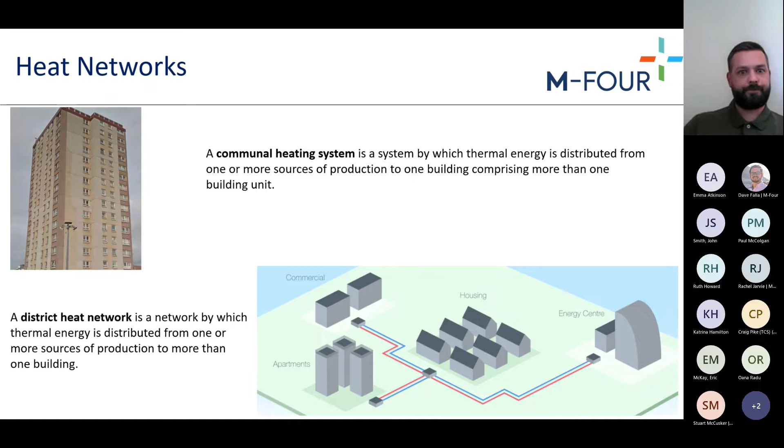So what are the benefits of heat networks? Both new and existing heat networks have significant potential to contribute to our climate and fuel poverty targets. A well-designed heat network has potential to deliver heat at scale far more efficiently than lots of individual heating systems generating heat within the home, often involving combustion.

There's even greater potential when we think about the heat network scope for incorporating low carbon heat sources and other types of renewable technologies. Heat networks are very much local infrastructure projects, and they are able to make use of existing local infrastructure and industry. It is possible to use what would essentially be waste heat from industrial processes or from waste and sewage.

Low carbon technologies such as heat pumps can be used - air source, ground source, water source. The great thing about using heat pumps is that one unit of electricity will result in multiple units of heat, so they're very efficient.

Where we are looking to move to the electrification of heat, and particularly within our heat networks, the option to include local electrical generation and storage, such as PV and battery, can make it even more efficient because it reduces the amount of electricity that has to be purchased from the grid at cost, and potentially, at the moment definitely, much more carbon intensive electricity.

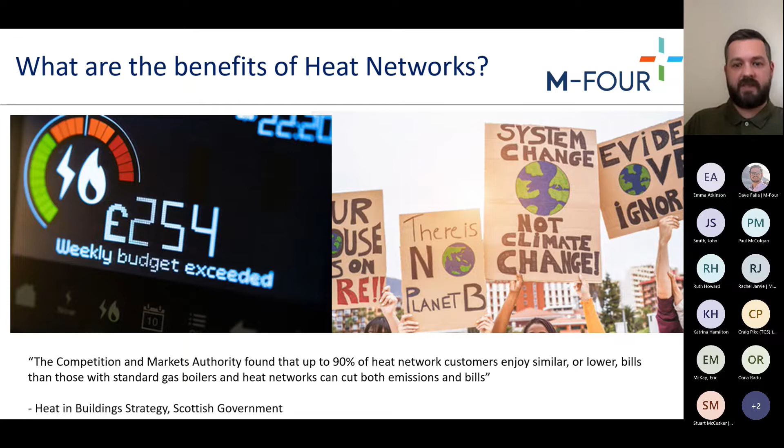Now that doesn't sound like a massively bold statement, it's a little bit vague, but as we get through this, we'll talk more about how completely unregulated heat network markets are at the moment, and actually how impressive that is, given that there are very little rules to follow or customer protection in place around these things. So again, it's another example of heat networks being effective and efficient.

So what do the Scottish Government think about heat networks? Well, unsurprisingly, they think they're great too. The Heat Network Scotland Act sets statutory targets for the deployment of heat networks by 2027 and 2030. The Act aims to accelerate the deployment of heat networks in Scotland through introducing a regulatory system which is aimed to boost confidence in the market, both from consumers and to give greater certainty to investors as well.

So the Scottish Government, within the Heat in Buildings Strategy, have identified a number of no and low regrets strategic technologies which they are confident can be deployed now. The technology there, it's proven, and it can make an immediate impact on our progress towards our net zero ambitions.

So these technologies are energy efficiency - so this is fabric first and demand reduction. We've been talking about this for a long time. The most important thing we can do, the biggest win we can have, is to actually reduce the amount of energy that we need to use to heat our homes in the first place.

The other strategic technology is heat pumps. Various priorities there, the biggest priority being heat pumps in off-gas areas. Still a challenge with heat pumps in on-gas areas due to the cost of electricity there, and there's also some considerations around which areas may or may not be moved on to hydrogen in the future.

And the other one, and the subject of today's session, is the low and zero emission heat networks.

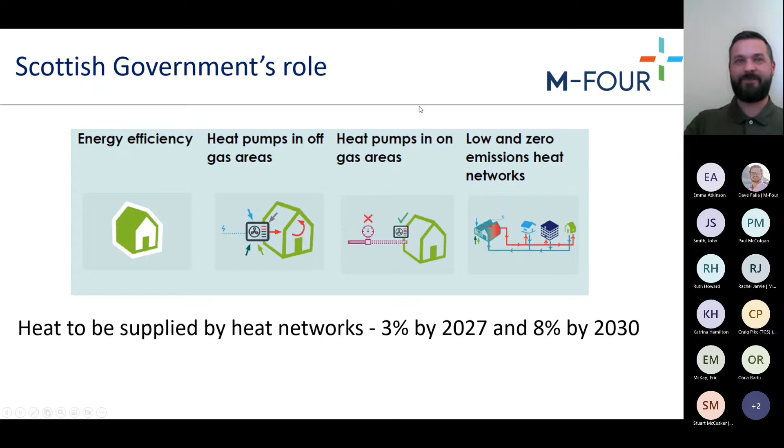So the Heat Networks Scotland Act 2021 is really looking to pave the way for a regulatory framework and help grow the heat network market. I'm not going to talk about this in a huge amount, but I will summarise some of these key requirements that are introduced.

So the first two there, the building assessment reports and the heat network zones. The assessments and zoning are putting greater consideration to thinking about heat networks in the planning stages of developments and providing additional support to do that. An example of that is that in April this year, the Scottish Government published the Potential Heat Network Zones First National Assessment. This report provides the methodology and potential for heat networks, as well as heat network potential maps for the whole of Scotland.

Licenses and consents. The idea of this is to provide greater scrutiny of planned developments and to ensure that the high standards expected are delivered by fit and proper operators. Permits will give longer term assurance on potential customer bases to investors, and power for license holders should reduce the time and cost of the construction and maintenance of these systems.

And the final one, the asset schedule and the transfer scheme, place a requirement on operators to have a scheme in place for the transfer to a third party if required, should, for whatever reason, they no longer be able to provide heat to their customers.

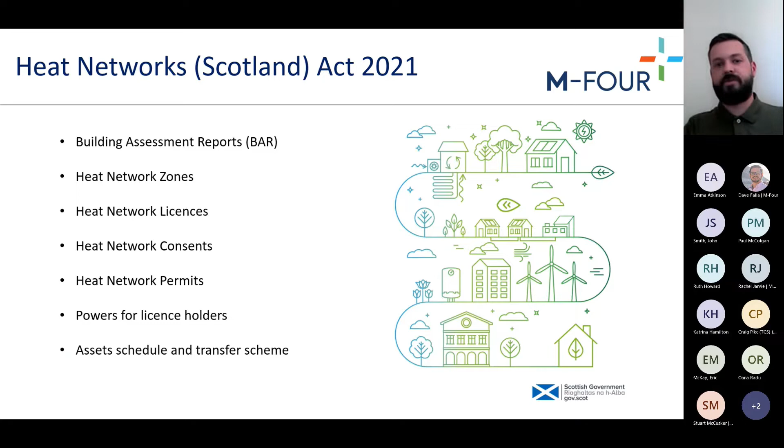So in terms of design and construction, not going to comment a lot on this today. It's a massive subject, as I said. It is one that M-Four do get involved with, but personally my role is in some of the other areas around heat networks. These are complex infrastructure projects. It could be said, or it is the case with any heating system, they need to be designed well and installed well, but that is particularly so with heat networks if we want to capitalise on the benefits that they can deliver. They require specific sets of skills and experience to design, install and operate them.

So at M-Four, we are involved in this. Whenever we provide support for clients, we ensure that the support we provide is in line with the Heat Networks Code of Practice for the UK. This has been developed by the Chartered Institute of Building Services Engineers, along with other bodies. There is an examination and certification there which can certify you as a heat network consultant as well. We always recommend this. We think it is a great tool. It helps to establish minimum standards and best practices to improve the quality and performance of district heating projects, from concept and design right through to the installation and operation of these systems.

It's a really useful tool for procurement for buyers. It places quite a bit of emphasis on the quality of the brief from the buyer to make sure you get what you want and what you need, and it gives advice on how to achieve that. You can specify within your tenders that you expect the requirements and process to be followed according to this code of practice. It also provides guidance on setting performance metrics, for example, the amount of heat loss you'd expect from the primary network. It gives performance metrics for those, allowing testing across various different areas of performance and at every stage to verify that.

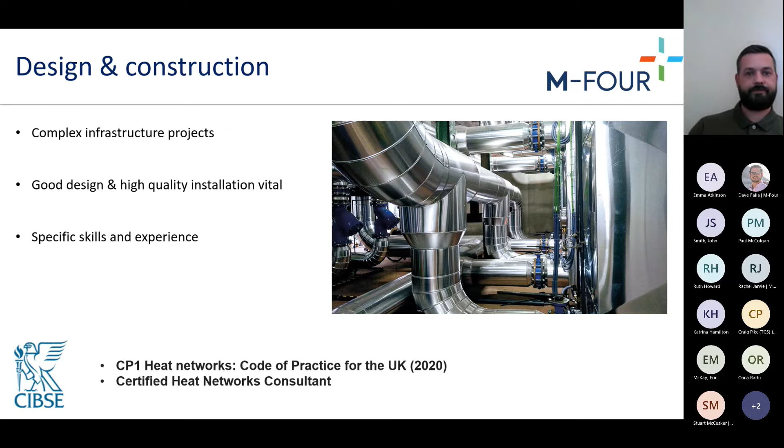One of the biggest differences with heat networks is that we're supplying heat. We're not supplying electricity or any other kind of fuel which can be used to generate electricity or generate heat within the home. Someone becomes a heat supplier. The heat networks metering and billing regulations define a heat supplier as any legal entity, person or organisation that supplies and charges for the supply of heating to a final customer through a communal single building or district multi-building heat network. So basically, if you're a heat supplier, these apply.

Now, what we're finding is that not everyone developing a heat network will want to become a heat supplier. Heat suppliers have a contractual relationship with their customers for the supply of heat, and there are various compliance requirements you have to adhere to. The organisations that fulfil this role can vary greatly from network to network. There's a lot of dedicated heat network companies out there, or energy supply companies. The property developer may decide to do it. Housing associations or local authorities, infrastructure projects and new developments might decide to do it. Community organisations, management companies. So it's a really big list, and it is very varied in terms of who can become the heat supplier.

So we'll talk about some of the challenges of compliance there. But there are advantages too. One is that as a company, you can set the charge for the kilowatt hours of heat that your customers buy from you.

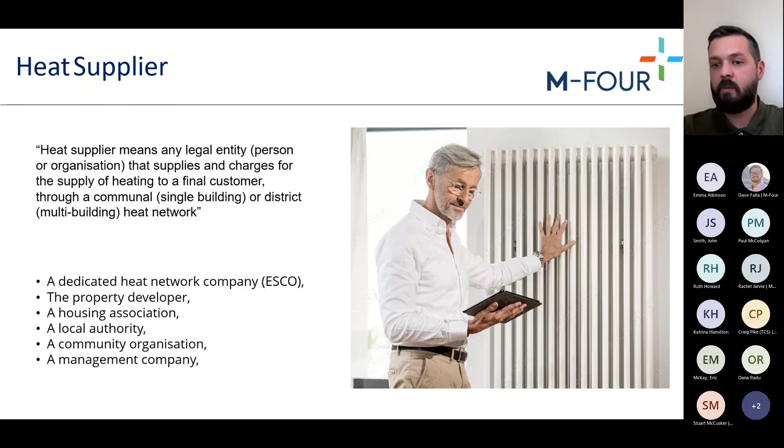If you're a community group, you may wish to create a fund allowing reinvestment in the community, additional energy efficiency measures, environmental and landscaping works, those kind of things. So it really is quite varied.

Metering and billing is similar but different on heat networks. Heat suppliers must comply with the heat networks metering and billing regulations, and we'll talk more about what's included. But one of the biggest differences is that with gas and electricity, we don't even think about it—our metering and billing is such a well-established process that it just happens.

There's probably a meter in the property already. If not, more than likely our energy supplier would deal with that, and with billing as well. But in the same way someone developing a heat network might not want to be the heat supplier, they might not have the skills, experience, or desire to be the metering and billing agent either.

So it's very common in the heat networks market to use a third party for this. That third party could do your metering and billing, and I believe it's also possible for these to be separated or incorporated into your existing finance systems. There are a couple of well-established companies out there, but it's a very new, emerging and competitive market—an exciting space with a lot going on just now.

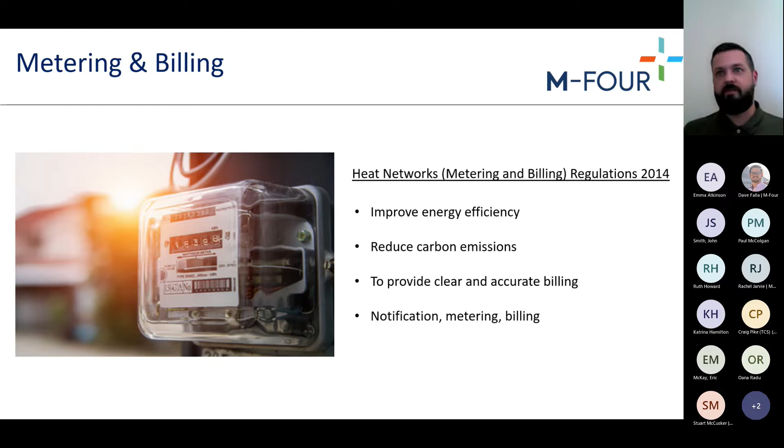Very useful—and this has now resulted in the first national register for heat networks. So we're starting to get much better information on where these heat networks are and how many people are being served by them.

Now, on the metering side of things, the regulations introduce a duty to install meters. There's two parts to this duty. One applies only to district heating, and that is a requirement that building level meters must be installed.

On a district heating system, a building level meter will register the amount of heat consumed by that building. A building may be one customer, but it's very likely, as we talked about before, a single building has multiple individual dwellings or business units within it. So if you've only got a building level meter but multiple customers within there, you have the challenge of working out how they proportionally pay for that and split it.

The second part of that duty applies right across the board, all types of heat networks, and that is for consideration to be given to whether final customer meters need to be installed. The final customer meter is self-explanatory - it's that final person who's buying heat from the network, or paying to put energy back into the network if they're cooling.

The way this is done is that the regulations create three classifications of buildings, and it's necessary for heat suppliers to carry out an assessment to determine the class of the building. The building can be a viable class where meters are mandatory and must be installed. There's the open class where you are required to install meters if it's not considered technically or economically unfeasible - we'll talk more about that. And then there's the exempt class where there's just no requirement to install meters.

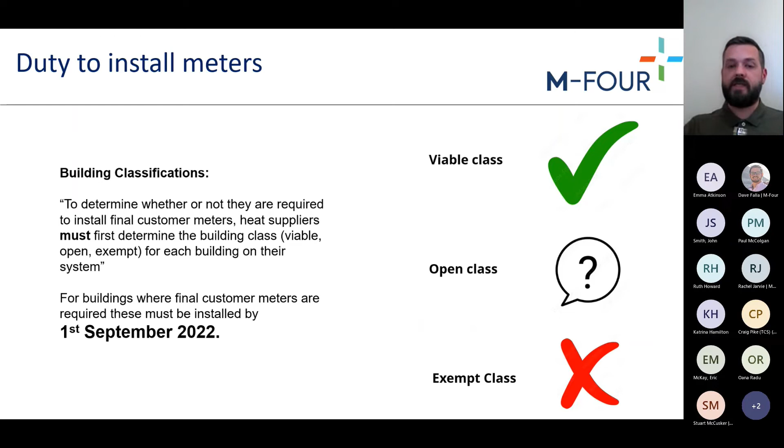On the billing side of things, it's fairly straightforward and quite common sense. The Act creates a duty to ensure that customers' bills are accurate, that they're based on actual consumption where that's available, and that they comply with the minimum standards required for frequency of bills and minimum billing information provided.

Some examples: if you've got a meter installed, you have to have an accurate bill once a year, very similar to gas and electricity. Bills should be provided at a minimum quarterly or on request, and they should tell you how much energy you've used, what you're being charged for that, and give details of organisations who can provide energy efficiency advice if you want to reduce your usage or you're struggling with consumption.

On the consumer protection side of things, this is very different at the moment to the gas and electricity markets. Regulation of the energy markets, competition and consumer protection are not devolved matters. It's not up to the Scottish Government, they don't have the power to set them. That remains reserved to the UK government.

In, I forget if it was December 21 or January 22, but very recently, the UK government have now appointed Ofgem as the UK regulator of the heat network market. So they're now beginning to develop a regulatory framework very similar to what we've got for gas and electricity, that will really put a lot of protection in place for consumers around standards of service, customer care, and pricing.

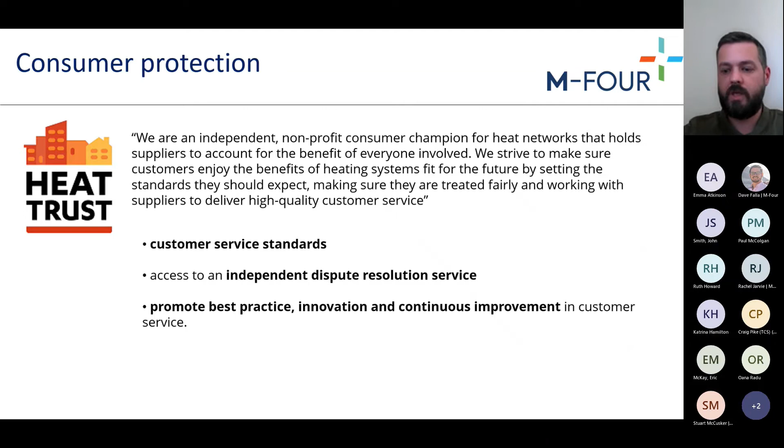That does allow me to seamlessly link to my Scottish Government funding section. There are two main funds at the moment from the Scottish Government which are supporting the development and rollout of heat networks: the Heat and Buildings 2022 Development Funding Invitation, and the Heat Network Fund. The first one is pre-capital support and the second one is capital support.

With the development funding invitation, what this looked to do is provide match funding at up to 50% of £50,000. You had to demonstrate the funding gap, and what it intended to do was fund the development of feasibility studies and investment grade business cases. The idea behind that is to create a rolling pipeline of projects which have been proven to be feasible and deliverable, and to then support them to go on and make a full application to the Heat Network Fund.

The Heat Network Fund itself is open to private, public and third sector organisations to apply, and consortiums are allowed, so it's really quite flexible in terms of who can apply and what can be done with it. It is for projects where the business case is already proven, and that's where the development fund comes in. They do want to see this turnover of projects happening.

That 2022 development funding application has closed now. Speaking to the Scottish Government, they think it's been very successful, potentially oversubscribed, with lots and lots of interest in there. So there's lots of interest across Scotland in getting funding to prove these possible options.

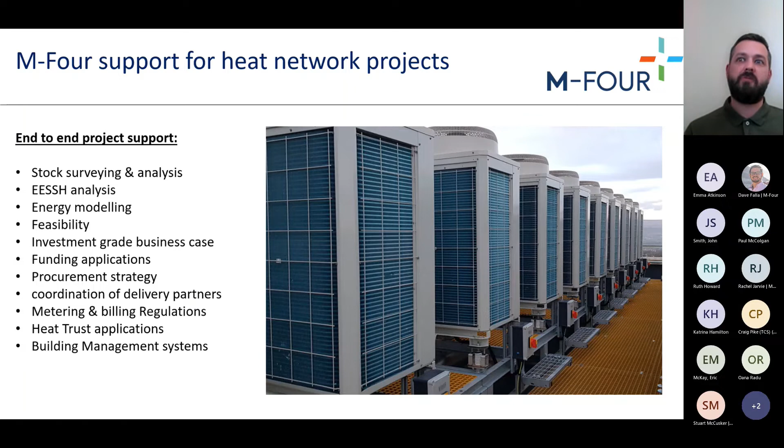One of the really exciting things is how that data can be used by artificial intelligence and machine learning platforms to understand the requirements and heat demand within that building, taking into account all these factors to really drive up the efficiency of these systems even more. I'm personally very excited for the next 12 months to see the data coming back from these systems and how we can push them even further.

An example of one of these projects is the one I mentioned already, where we've got Nicola Sturgeon visiting today. She's getting a tour of the communal and district systems, looking at the plant on the roofs of the high-rise flats and the centralised plant on the ground, really just getting a look at what the Scottish Government have helped to fund and celebrating the success of that project. I believe she is also going to try and speak to some tenants who have been positively impacted by that, and there's lots of them.

We're always hearing from tenants about how warm their houses are and how cheap the heat is that they're getting. So the project was with North Glasgow Homes, in Springburn in Glasgow. The objective was to look at ways of replacing the old costly existing storage heaters and derelict electric or electric wet central heating systems. These systems were not being used effectively, or in many cases not being used at all, because people were so worried about the cost.

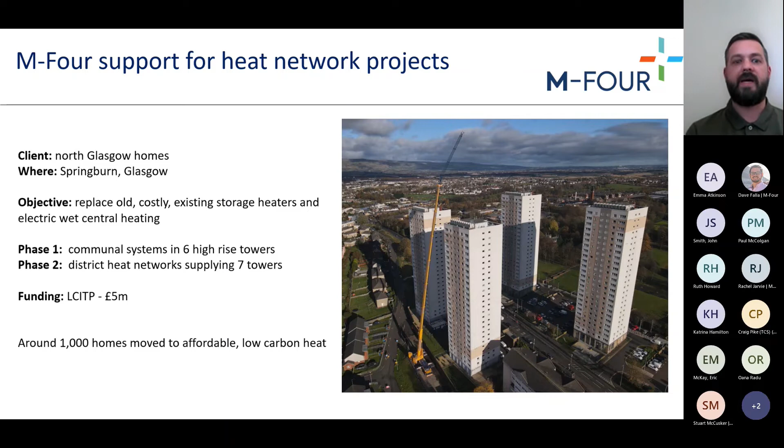When we look at some of the statistics for fuel poverty, this is actually one of the most deprived areas in Scotland according to the Scottish Index of Multiple Deprivation. We know from speaking to tenants and the landlord that there are people really struggling to heat and eat, and this is really helping them. So we're starting to get some great news stories back about the positive impact it's having on their lives.

So that's the end of the prepared slides. My colleague Dave may or may not be in the room, so when I open the floor to questions, hopefully he can help me out if anyone asks anything a bit too technical for what I've learned so far.

If anyone does have any questions or comments, I'd like to open up the floor to that now, and if there's anything I can't answer, I'm more than happy to get back to people. So does anyone in the room have any questions, comments, experiences or anecdotes you'd like to share with regards to heat networks?

Everyone's always a little bit shy in these things. It's a safe space, no question is a daft question.